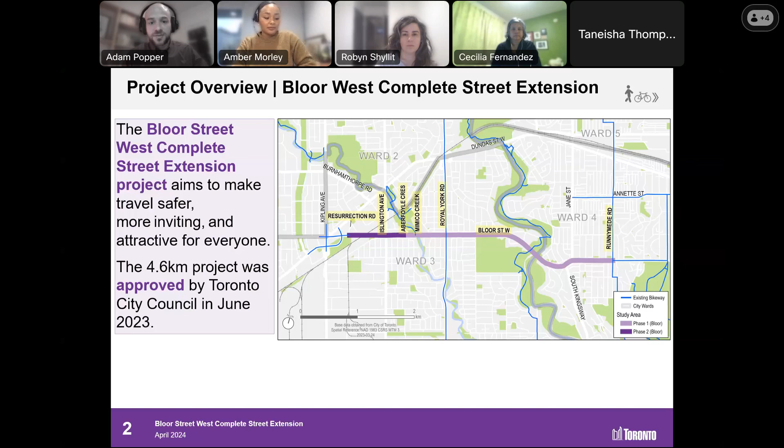There are 2 phases. The first phase has been installed, and the second phase is planned for installation in the coming weeks and months. The project goals are to improve safety for everyone, people walking, cycling, and driving. We're also looking to enhance the walking and cycling experience, as well as supporting the qualities that make Bloor Street a place. It's not just a road that we move through, it's a series of places all along. We're looking at those details, especially with the BIAs and residential communities, to enhance those qualities. Maintaining road space is also vitally important for transit, emergency services, deliveries, shopping, and commuting. We work with many partners to achieve all of these goals.

So what you may have been involved with in the past was the preliminary design. If you were a stakeholder like a business improvement area or a business, we did our original outreach to some businesses to understand loading and their pickup and drop off needs. We sent a mailer out to more than 30,000 residents and had 2 well-attended public consultation events. City Council considered the staff's recommendation at the Infrastructure and Environment Committee and Toronto City Council, and this was approved in June of last year.

Installation began in September. It was then paused for winter.

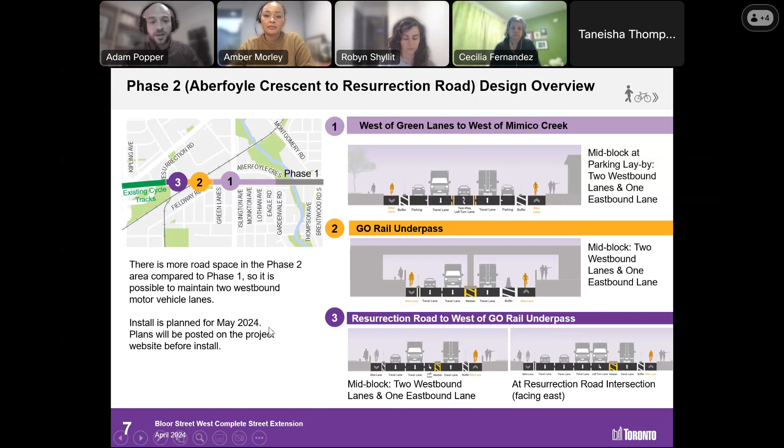Some updates we'll be making: there are some decorative curb extensions that also add flex post bollards to shorten the pedestrian crossing distance and reduce the exposure of pedestrians. We'll work closely with CafeTO to ensure that all cafes with requested permits can be added, along with green bus, bike, and turn queue boxes.

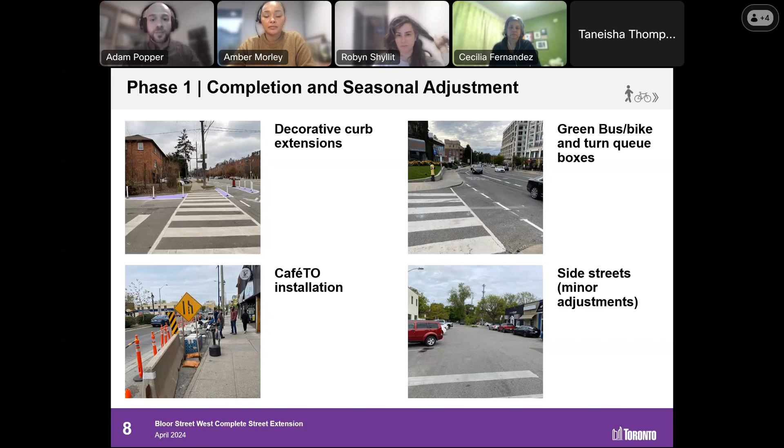The green paint that will help make certain intersection movements clearer for all road users and ultimately safer was not installed in December when we paused for winter. So that will come very soon, as well as some minor adjustments on side streets.

I mentioned some of the traffic signals that will be modified. These include Old Mill Trail, Jane Street, and Windermere. We're also looking at some safety and efficiency improvements in Phase 2 before we install, but this will come as a separate sub-phase later this year or early next year.

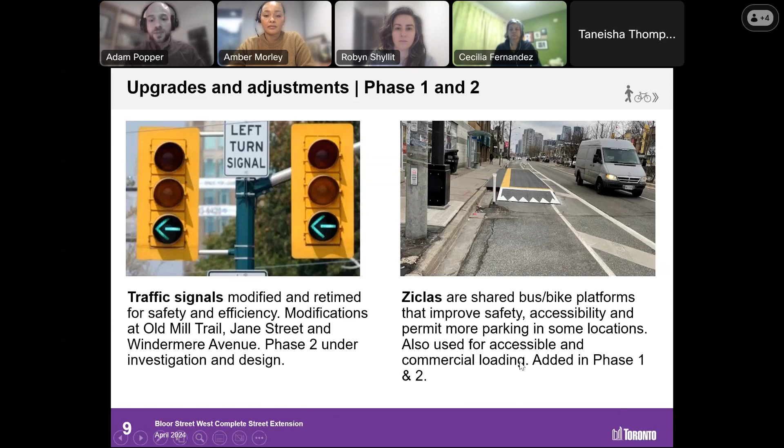We've already installed most of these Zicla platforms. These are where bus passengers board on a raised platform, so people don't have to step off the sidewalk, nor does the bus have to pull to the sidewalk. It straightens out the route for bus drivers, who much prefer this. There are accessibility benefits, and also the ability to preserve more parking. So there are lots of benefits to these, and we'll be adding more in Phase 2.

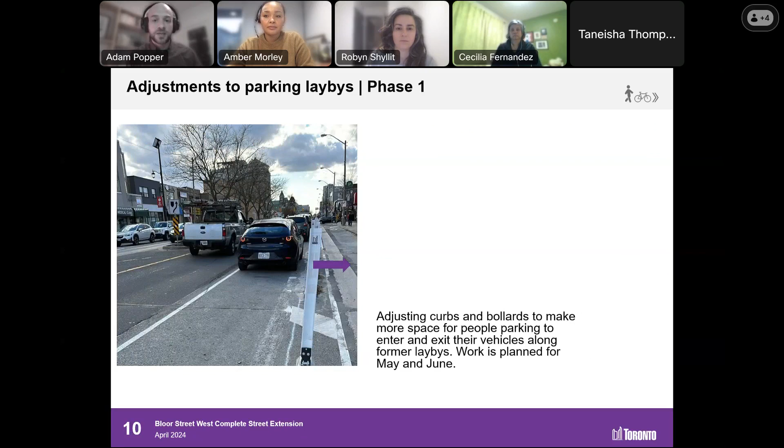Many people have provided feedback that there is not enough space for parking, especially along the Kingsway where there's a center median. So we're looking to make adjustments in the coming weeks where the curbs and some of the paint will be shifted toward the sidewalk, thus providing more space for parking while still providing space for people cycling.

Today, the bridges do not have physical separation. There's a special set of considerations when we work on bridges to ensure that they're structurally sound.

The other opportunity here is to work with local artists to paint special barriers, which will help honor those particular localities, and that's Humber and Mimico.

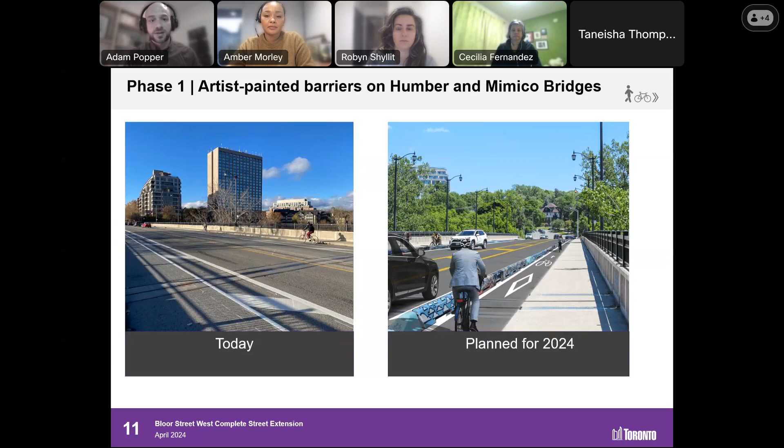We're also looking to make specific spot improvements where there are other gaps in the network, such as the missing sidewalk along the cemetery. That's planned for this summer.

I mentioned some updates that are coming. This is a detailed design concept file, but just to give you a sense, here is Grenview Boulevard on the north side, and what we're looking to do is straighten out the bikeway and improve some public realm areas, as well as some green infrastructure.

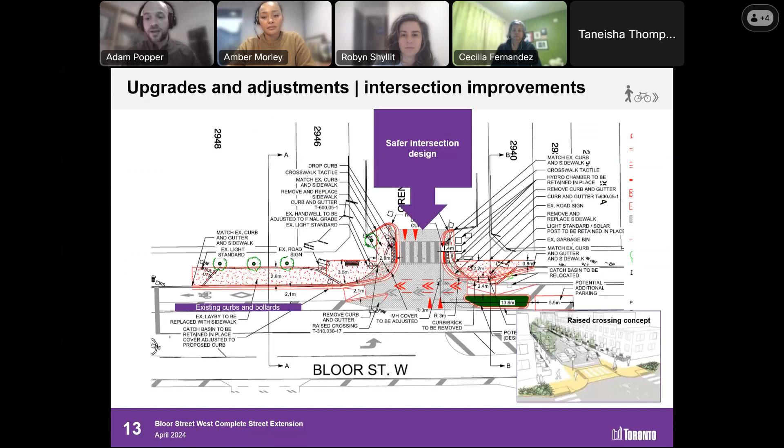At the same time, we'll be adding a raised crossing, which brings pedestrians up to the level of the sidewalk - it's sort of a speed hump for drivers. All of these things are planned for this summer, and some will be happening in the next construction season.

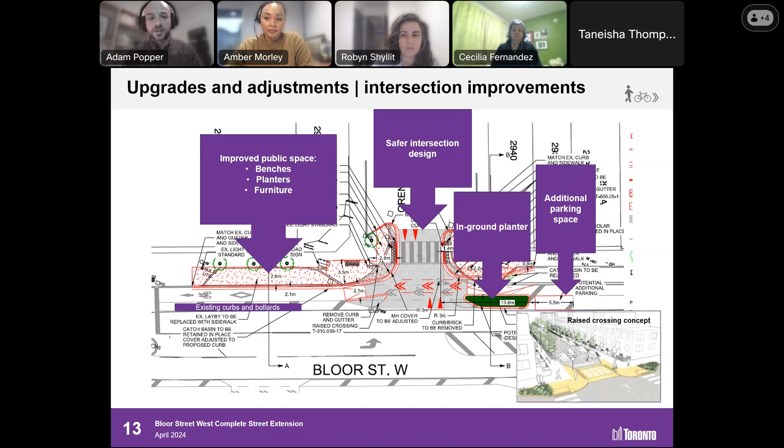Many people are interested in measurement. We took many counts before the project was installed. All of these are available on open data, and we're also happy to share them with you. If you're interested, you can always email the project team.

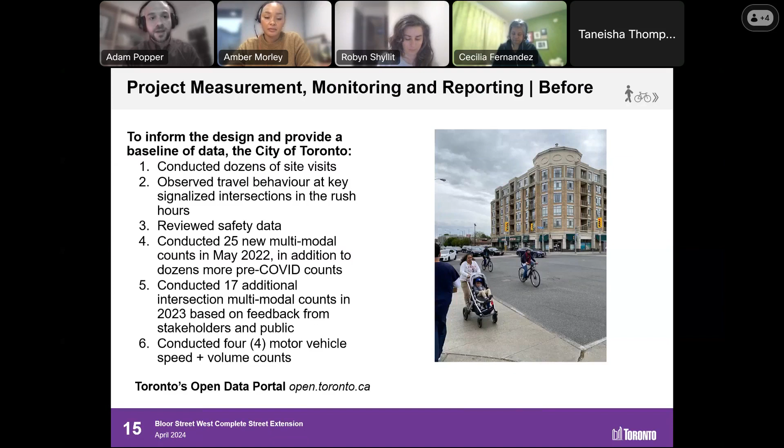Afterwards, we've also started to collect some counts on vehicle travel time and vehicle speeds that will be released very soon. That's an initial snapshot, but this work is ongoing. After we do those counts in May, there'll be a larger release of data on the website. Many people are interested in this, and we're happy to share it.

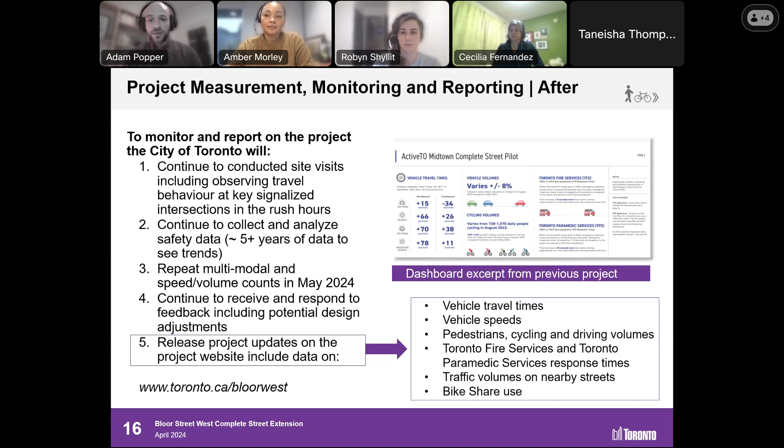This is part of how we analyze our projects, learn, and continue to connect with members of the public and interest groups.

I just want to give you a 30-second rundown of the website, just because there is a lot of information there.

Many people have asked questions. There's a large FAQ section at the top, installation updates. As phase 2 comes into play, there'll be an installation notice mailed to all residents, but if one of your neighbors says something, or if they accidentally throw it in the recycle bin, all that information will be posted here.

We received lots of feedback and made many changes as a result, as well as a variety of specific questions people have about how to get a new accessible loading zone added, how the traffic study was conducted, and so on. So we really hope you can get most of your questions answered by looking at the website.

And if you still have questions, please email us at bloorcompletestreet@toronto.ca, and Alyssa will direct it to the best person.

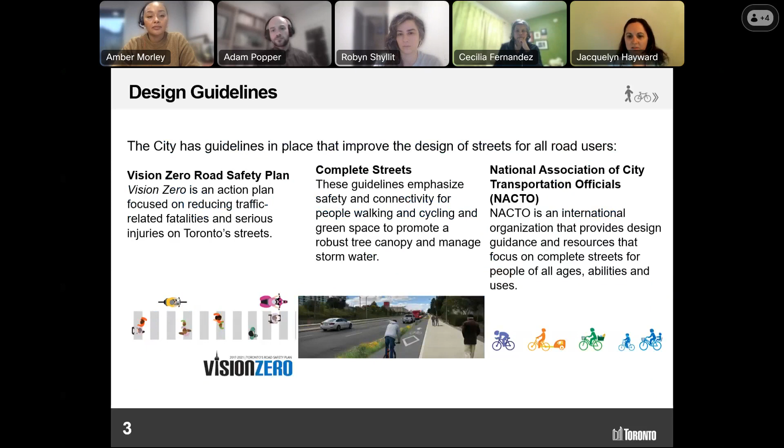We also work through design guidelines that are both city-oriented as well as in the overall transportation and engineering field. The Vision Zero Road Safety Plan has specific design guidelines, as well as the Complete Street Guidelines and the National Association of City Transportation Officials guidelines around these types of infrastructure developments.

A complete street approach is language you've heard us talk about, and that's very much about building streets for people - prioritizing safety and universal accessibility, as well as the places those streets are in, in terms of community space and places to sit, having a public realm that you walk along, and streets that support local business in terms of local loading and parking needs, CafeTO, and mobility options to support operation of business along these corridors.

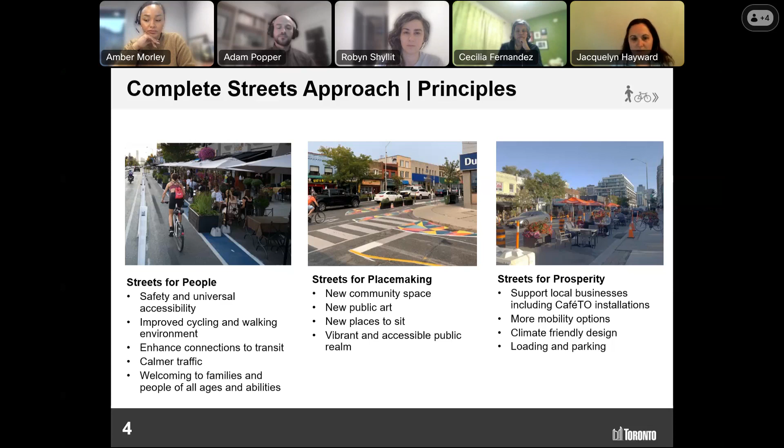The Vision Zero approach is what the road safety plan is based on - direction from Council that we should be building our roads such that no fatalities as a result of collisions, or serious injuries as a result of collisions, are acceptable on our streets.

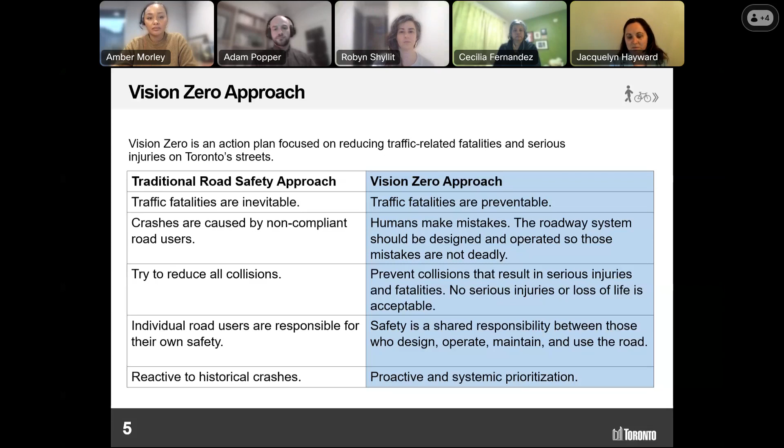And yes, that is a lofty goal. It is difficult to achieve, but it is a goal that cities around the world have been making strides toward. It is the notion that traffic fatalities are preventable, and it's a systemic approach to changing the way we design and operate our transportation system in order to support safer roads for people who live within our communities and use those roads in all different ways.

The Road Safety Plan at the City of Toronto is built with 6 key objectives that are our focus areas right now: the speed management strategy, which I'll expand upon, as well as road design improvements, some of which address high-risk mid-block crossings and left-turn and right-turn collisions. There's also an element of enhanced police enforcement and education and engagement.

The emphasis areas are the areas of vulnerable road users that we focus on trying to reduce collisions for, because they're most impacted by collisions - primarily pedestrians, school children, older adults, as well as people cycling and motorcyclists.

The speed management strategy I just referred to is very all-encompassing, in terms of a revised speed limit setting practice for roads across our city, from arterial roads and collectors down to locals. You've seen us, I'm sure, on many of the roads you use, having those speed limits come down. It's also about changing the way roads are designed in order to induce the revised speed limits to make that safer.

Enhanced police enforcement is something we help fund the police to focus more on road safety initiatives, as well as the automated speed enforcement - we have 75 speed cameras across the city and are looking to increase those when contracts for those are available. We've been deploying Watch Your Speed signs primarily on local streets, trying to make sure the speed enforced for those streets is in place and is achievable.

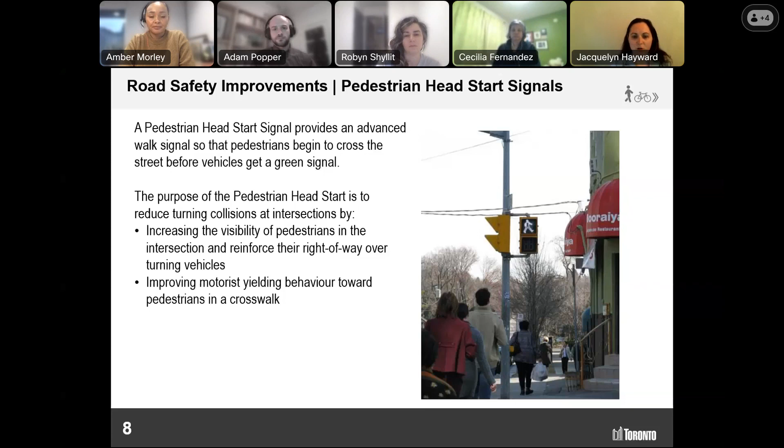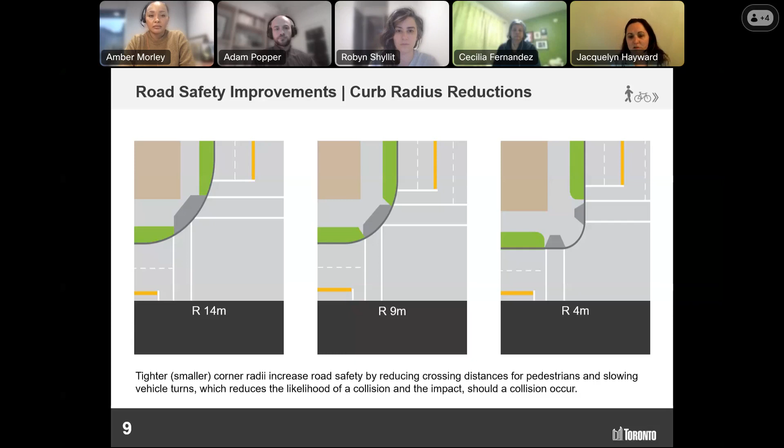Another road design improvement, which Adam touched upon, is corner radii changes, either painted or permanently constructed. When we have a tighter corner radius, we increase road safety because the crossing distance for pedestrians is reduced, and it slows vehicle turning movement so that if collisions happen, the impact is less likely to result in serious injury. So those are just a couple of the ways projects like this produce road safety benefits.

I'm going to spend a few minutes talking about the cycling network plan as well.

This is a plan that was approved by Toronto City Council initially in 2016, which builds upon the existing network of cycling routes to both connect gaps in the network, to grow the network into new parts of the city, and to increase the quality and safety of the existing cycling network routes.

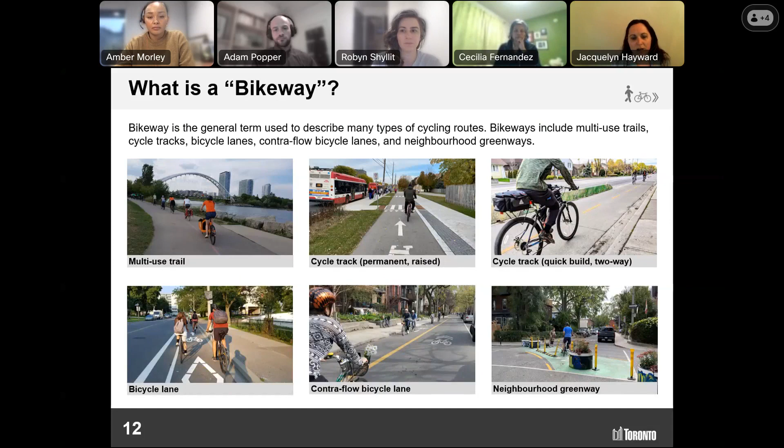When we talk about cycling network, there are many different types of bikeways. You'll see the cycle tracks that are on Bloor Street as one example, but painted bike lanes, multi-use trails, and slow neighborhood greenways or contraflow bike lanes are other ways in which the cycling network is appropriately designed for the different environments that it's in.

When we make recommendations to council as staff, we take inputs from the public because you have lived experience and expertise living in your communities, and we couple that with the policy direction that we have from council and the prioritization frameworks that projects are assessed upon, as well as the technical design standards. So those things come together to bring forward a recommendation in the most objective and data-driven means that we can, balanced with the public input that we receive.

In developing the cycling network plan, we seek public input at that plan level, and I'm going to talk a little bit about the plan level in a moment, as well as at the individual project stage. I know that Adam spoke about the kind of engagement that happened with the public through earlier phases of the Bloor Street project, and we'll continue to seek feedback and adjust the project as needed based on feedback that we hear.

I mentioned earlier the prioritization as the cycling network is developed. The kind of categories that we include are around safety, where there's a history of safety concerns. Locations are identified to be able to be prioritized.

An important aspect of our work is ensuring that the cycling network and all transportation infrastructure is provided in an equitable way, making cycling as an option accessible to more people of diverse community needs.

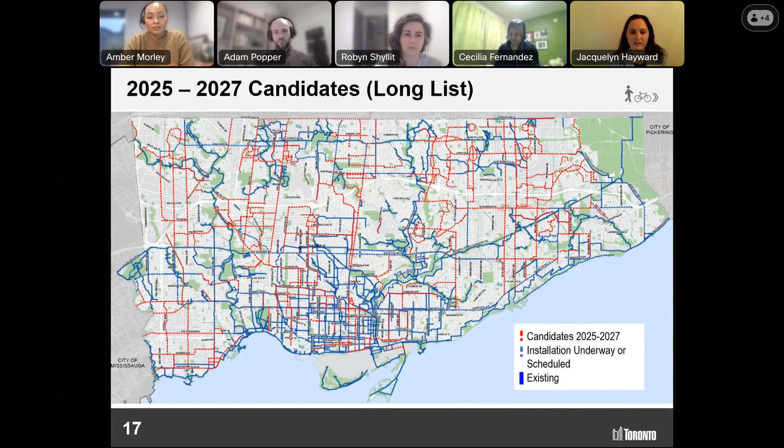So we've been working on an update to the cycling network plan for the 2025 to 2027 period. Currently, there's a long list under review to bring what you see on this map in red down to a sizable number that can be delivered within a 3-year period.

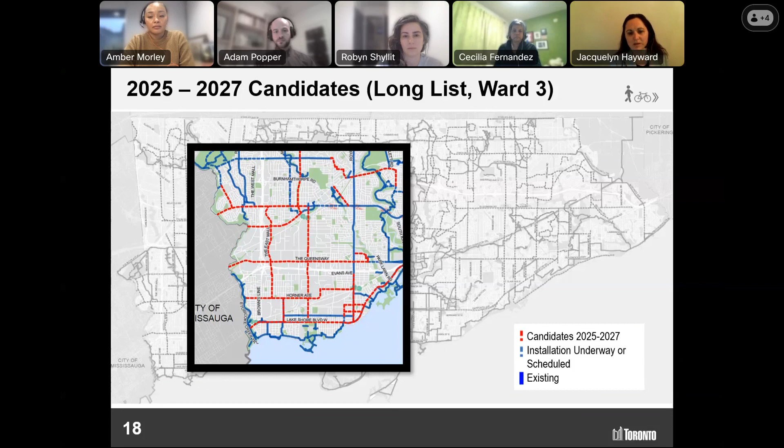For Ward 3, you can see the red lines are the candidate routes that we're currently undertaking some very preliminary technical feasibility assessment on, to be able to inform whether those routes would be studied or further designed and consulted on in the next stage of the project.

Some of the projects identified for Ward 3 are because there is upcoming road work, either in 2027 or in the years following, like 2028, 29, 30. So it's a good time for us to be studying these routes to determine if and what the right cycling network connection could be within this next stage of the plan. Some of the routes identified here are within this ward, but at this point it would be the study work that would happen for potential future implementation bundled with future road work.

Future road work is a really important time for us to be considering these routes because there is a greater likelihood that we can accommodate the cycling network improvements on some of these streets without impacting as much the vehicle lanes, and having less construction impact for the community.

There are also 2 routes within this ward that have been identified that would require extensive feasibility study, so we're currently assessing whether they would be prioritized in this time frame.

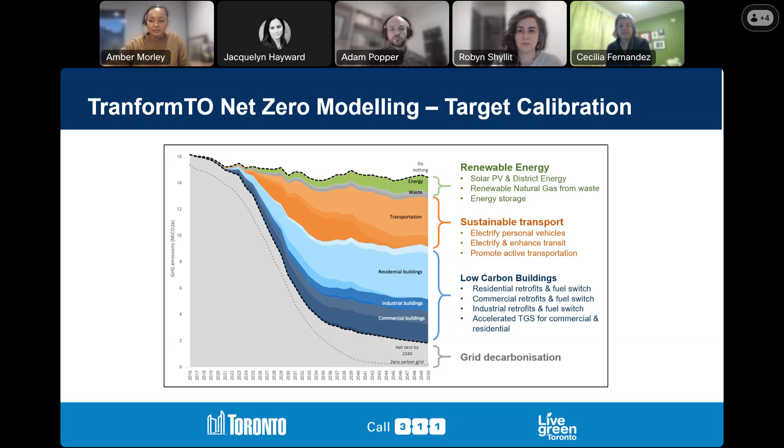By 2035, most vehicles sold will have to be electric. On the city side, we're trying to orient everything towards 75% of school, work, and transit trips under 5 kilometers being walked, biked, or by transit. I see these projects as being very relevant to fitting into and nesting into our larger climate goals.

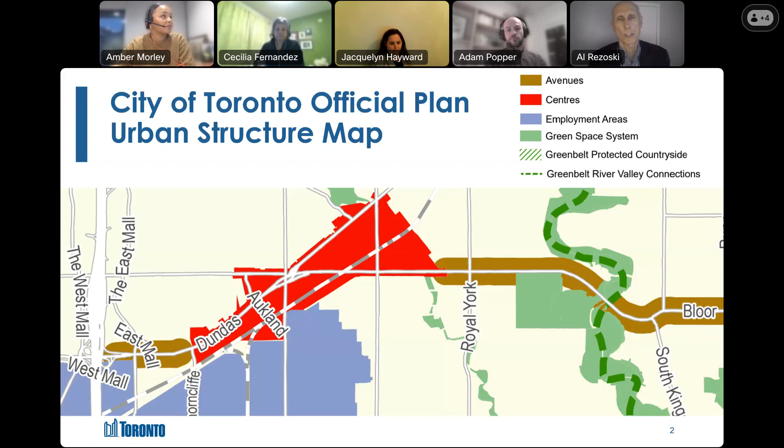So along the corridor, we have two distinctive areas. We have at the east end, within Ward 3, an avenue, and this is from our urban structure map in the official plan. Then we get into the red area at the western end, which is the Etobicoke Centre. There are other areas that have some frontage on Bloor Street, such as parks and open space, which you see in green, which would not be receiving much in terms of development activity.

So what are the avenues? These are important corridors along major streets in the city of Toronto, and this is where we are anticipating reurbanization - increased height, increased density from what we see in these areas. They have a lot of potential. They're generally well served by transit, so this is our opportunity to create new housing and jobs.

And the Etobicoke Centre is one of the growth centres in the city of Toronto. We have other ones like Yonge Eglinton and downtown Toronto. We want to enhance the concentration of employment and housing within these areas, and we want to take advantage of the wealth of transit in these areas. Also, these areas generally have a lot of infrastructure that can support the growth.

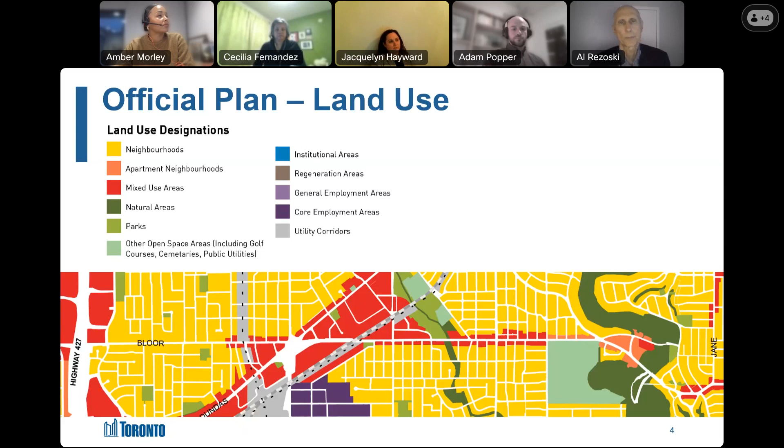So this is where most of the growth is happening within the city of Toronto. That is the good news side of it, that it is being contained in areas where we want to see it. We also try to balance the growth in these areas between employment and residential uses - it's not just about creating a lot of new high-rise condominiums. We want to make sure we have that balance. We also want to make sure within these areas that we are locating and massing new buildings to provide appropriate transition for areas of different intensity and scale, particularly on major arterials like Bloor, where you may have, behind the fronting properties, a neighborhood designation.

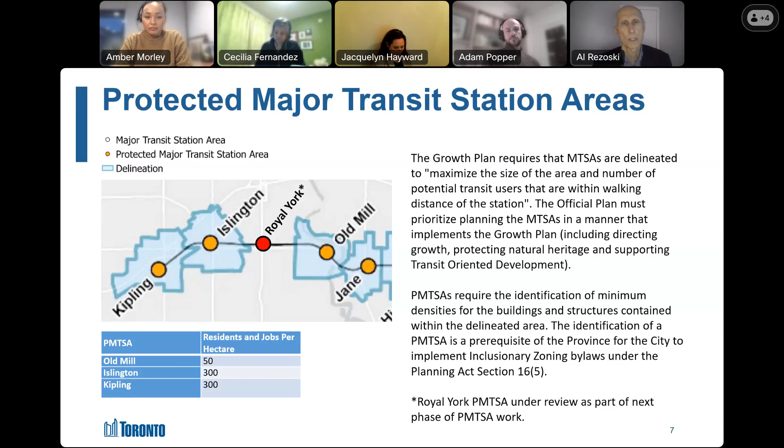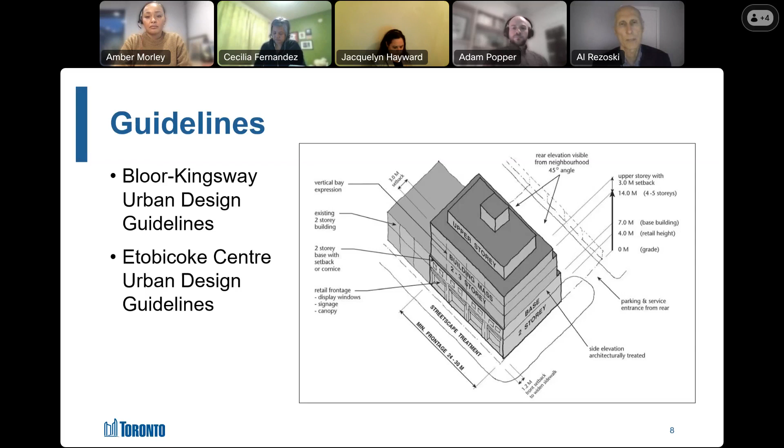So I'm going to talk now about development activity within this area. I think we also want to set this up by saying there are a lot of application requirements that address some of the concerns that come up through our community consultation.

One of them is a transportation impact study, and that looks at everything like: are there signals that have to get adjusted because of the additional traffic that may be occurring in these areas? What is the vehicular parking, the bicycle parking, if there's showers that are required to support active transportation in these areas? We also look at any transportation mitigation strategies - how can we reduce vehicular modes of travel, trying to get people more into active transportation, whether that's walking, cycling, or taking transit.

There is also a concept site plan and a landscape plan that is provided, and that's when it gets into details in terms of sidewalks, walkways, patios, clearways, that type of thing. And then there's also the site plan application, which shows the streetscape features, and there's a long list of items that are required for staff review.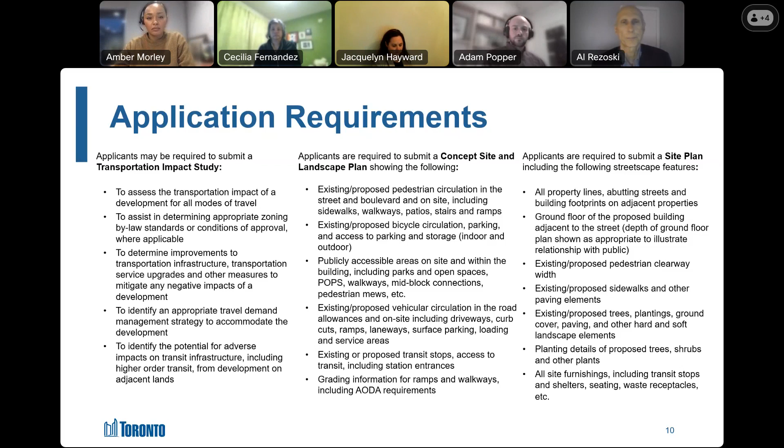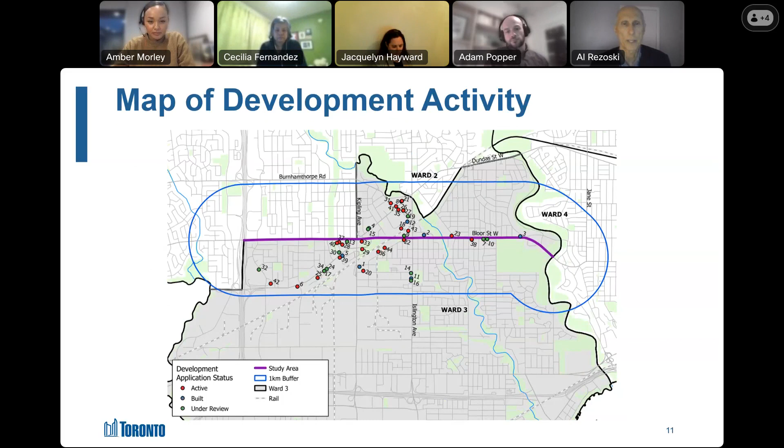Here's our map of Ward 3. The gray is showing Ward 3. We do have sections of Bloor Street that are in Ward 2, to the north and west of Ward 3, and Ward 4 is to the east side of the Humber River. The development applications are divided by active applications, what have recently been built, and applications under review.

The accompanying table has a 3D representation of what we are anticipating along Bloor Street as it crosses over Dundas Street West. You can see there's a lot of development application in the Etobicoke Centre, up to heights of 55 stories, similar to growth pressures we're seeing in other centers like the Yonge-Eglinton Centre.

We are trying to find a balance. Because these areas are very transit rich, we have multiple layers and additional layers coming, like bus rapid transit into this area. We are trying to make sure we're getting people shifting in how they get around. We are also providing jobs within the center so people ideally can be very close to where they work. Otherwise, they would be taking transit perhaps to destinations within the city of Toronto and the larger GTA area.

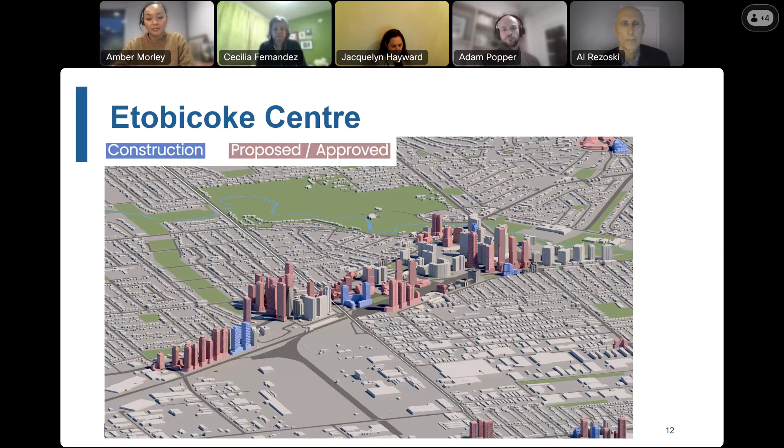Bike Share Toronto infrastructure is part of our review process, particularly for larger developments—we have large multi-tower and multi-building developments being proposed. Generally we are requesting 1 to 2 standard bike share stations per 500 residential units.

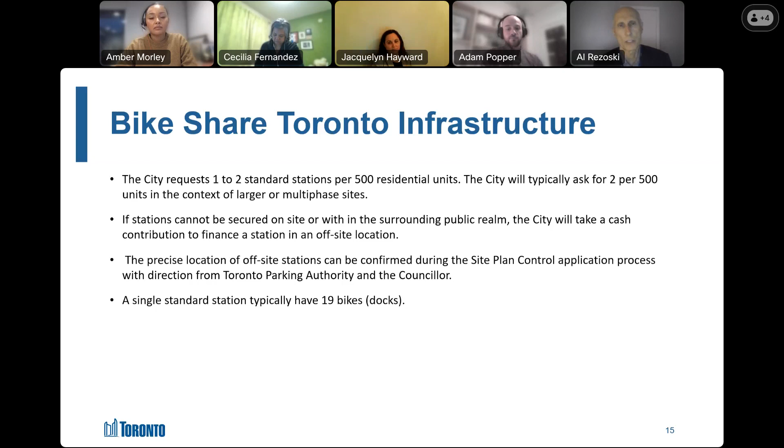In concluding, I just want to say that we have a lot of development activity occurring in this area, and what we are trying to do is find some balance. Certainly by doing a complete street project like this along Bloor Street West, it gives us the opportunity to encourage and support that type of active transportation. Thank you very much.

Thank you so very much, Al, for sharing that information. It's always amazing to me the level of demand and interest in development in the ward. So I hope folks can also appreciate the volume that we're anticipating and the work we're doing to set up a really healthy environment for that growth.